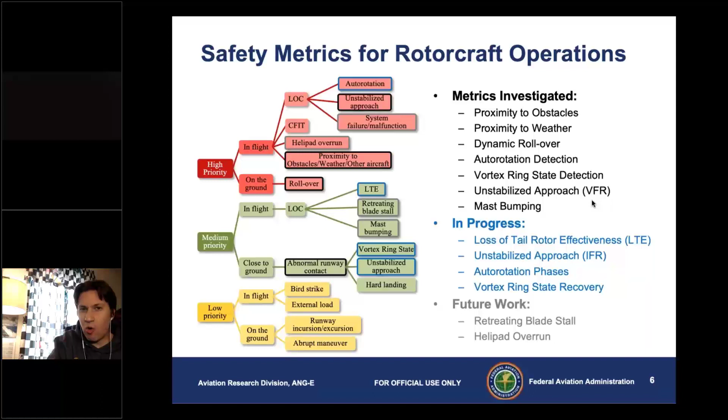So when I talk safety metrics here, I'm referring to things that are more than just your typical exceedance or event. These are a little more involved to monitor for. They may involve other data sets and other things that we have with the helicopter. This is a whole list of ones that we have, and I'll talk about some of them during the presentation.

The proximity to obstacles one was one we looked at very early on, which identified obstacles and their location or proximity to the helicopter. They're essentially a hazard. So what's the hazard? How close are they? Are they no threat? Do they potentially violate separation criteria? And we put that over a map.

We did the same thing looking at weather, using something called the vertically integrated liquid, or VIL value. It was essentially our way of categorizing weather, going from no weather, clear skies, all the way up to heavy rain and large hail.

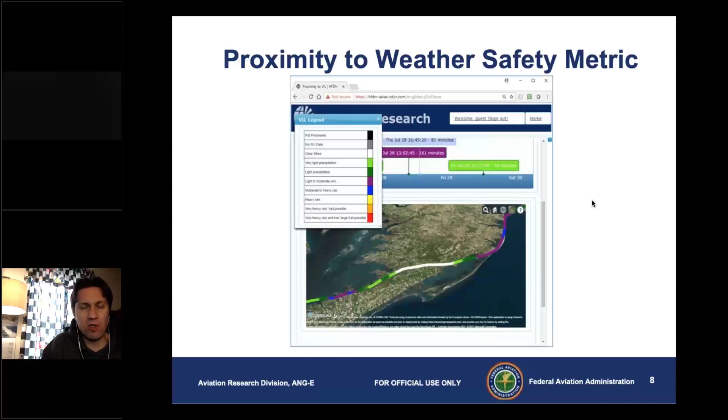And again, the idea of putting this on something like showing with the flight path. The next thing I want to talk about, and I'll spend a little bit of time on, is really this metric of approach stability. And you just saw there, let me back it up here a little bit and run it again.

Let me see here. The green helicopter represents a stable approach path down to the helipad. Actually, that one probably goes over it, right? But the orange and the red, they're kind of unstable, right? So how do you quantify that? It's really hard, right?

Helicopters are different than airplanes. We all know that, right? They fly differently. And the glide slopes are different, depending if you're a steep approach, shallow, or normal, right?

So our approach to try and tackle this was, rather than set specific definitions or guidelines for the approaches and then seeing which ones fit into that, we tried to use more clustering type of techniques to quantify the stability, but leave it flexible so that it could account for those type of things, and then use statistical analysis and machine learning techniques to try and search for patterns in the data that identify unstable approaches, or at least the precursors to it, right?

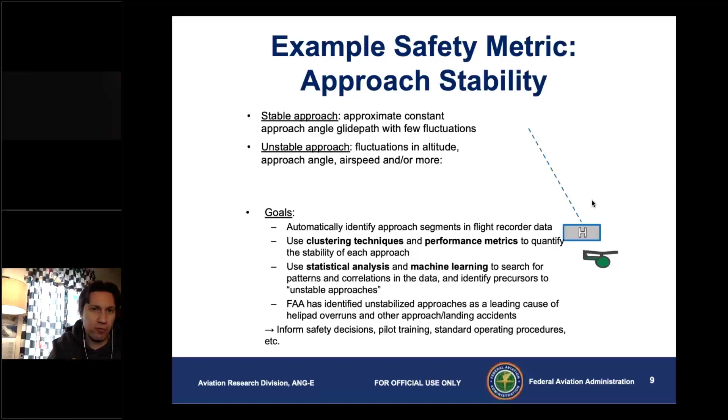And we know if we're high, we're fast, that's probably going to be a bad thing, right? Or if we're low and slow. So those type of things as well. The process works very similar to what you saw with the ADS-B data, but with a caveat to it. So again, we're looking at flight data records. Those records contain takeoff, landing, and everything in between, so you have an en route phase, right?

So we don't care about the departure phase for this particular metric. We only care about the approach. So how do we quantify that? We have to detect that there's an approach there. So that goes into some algorithms that look to see, are we executing an approach? Are we descending? Number one, and then are we near a helipad or an airport, or a landing zone, scene, different things? Does the approach have those characteristics?

And then we split it by, is it a visual approach or is it an instrument approach, right? And we have different stability criteria for each.

Yeah, I think somebody came on, but that's all right. Stuff happens.

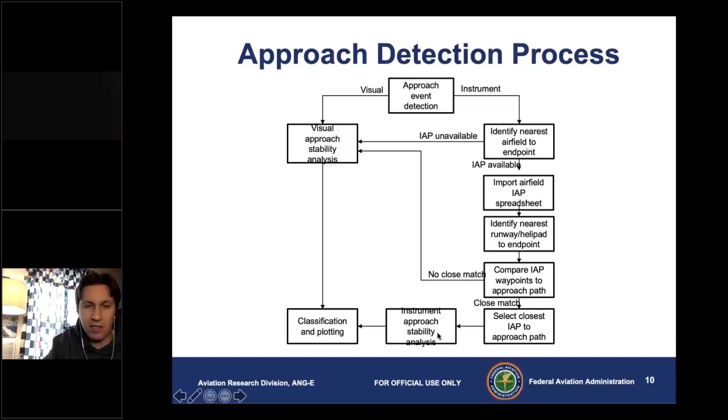So we have the visual. We go one direction, and we can't make it quite as tight as we do on the instrument. But the instrument, there's more steps to it, because we've got to identify that it is an instrument procedure, which IAP corresponds to that. Does it match? And then if it matches, can we perform the stability analysis on that? So we have this whole process.

So again, showing that we start with the published approach plates. We look up the threshold location from the database. We had been putting this into a spreadsheet before. We worked to automate that since then. We read it into, for lack of better words, MATLAB, we do some processing on it, and then we essentially build out these approaches.

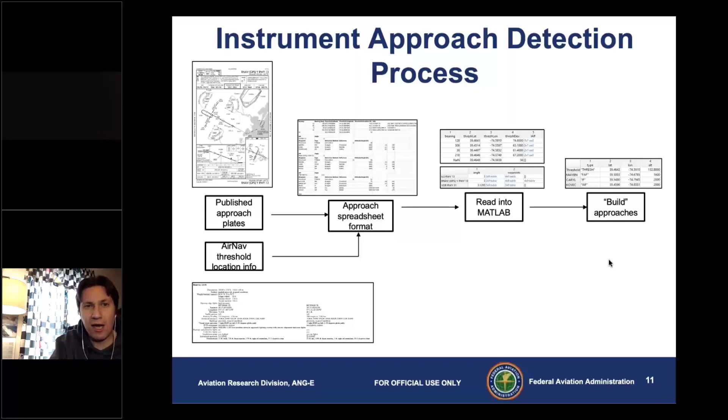Now, we also pull the data from the coded instrument flight procedures database. So that's eliminated some of the intermediate steps. But we still have to identify where all the key information is that we need to detect the approach, and then to see how well that approach is being flown, how stable is it? I shouldn't say well, because things can be unstable with no fault of the pilot at all. It's just something that happens.

So to extend upon that line of thinking a little bit, we didn't focus just on approaches. We started looking at holds and procedure turns as well, to be able to detect those in the data set. So that's part of it. So we look at how would we detect those, and the holding pattern, is that being flown correctly?

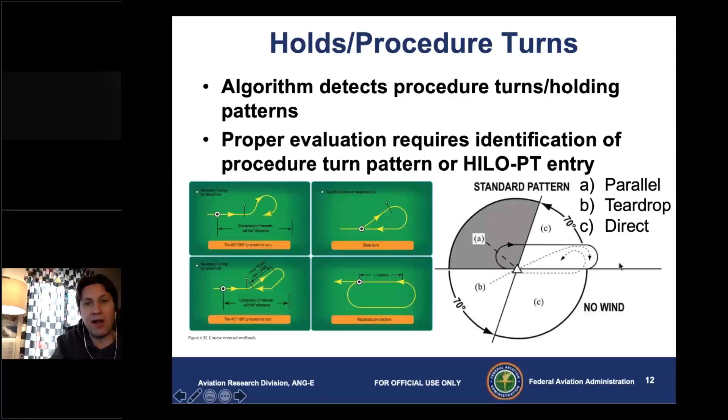But if we can identify a holding pattern, that may be another clue that we're at an IAF or on the procedure turn of an approach procedure. So here's an example of one: the ILS to runway 13 here at Atlantic City, where we have the standoff distance here. Here's the ground track, here's the distance to the waypoints, here's the closure rate and everything that shows here.

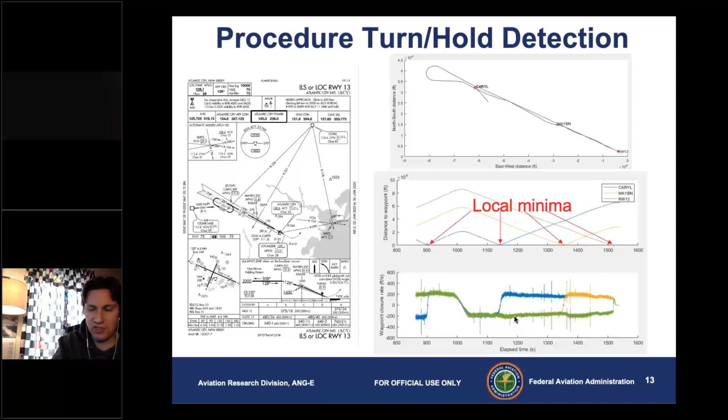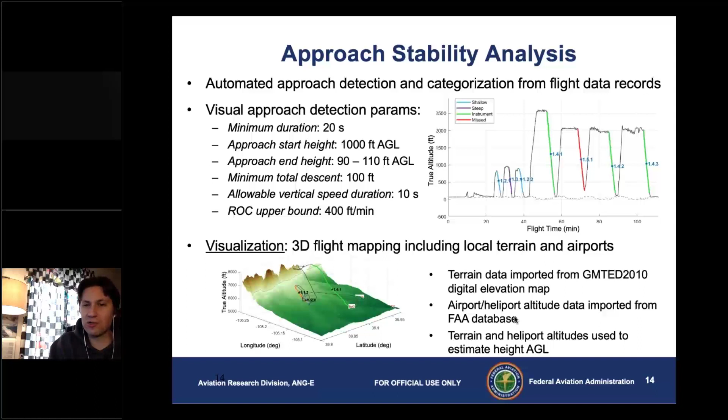The other thing that we started to do is try to visualize it. So we have to consider the terrain. We import that from one of the terrain databases, we bring in the heliport or the airport, and then we use that to estimate the AGL height, which is really important, especially if we're going to a helipad that's not at ground level.

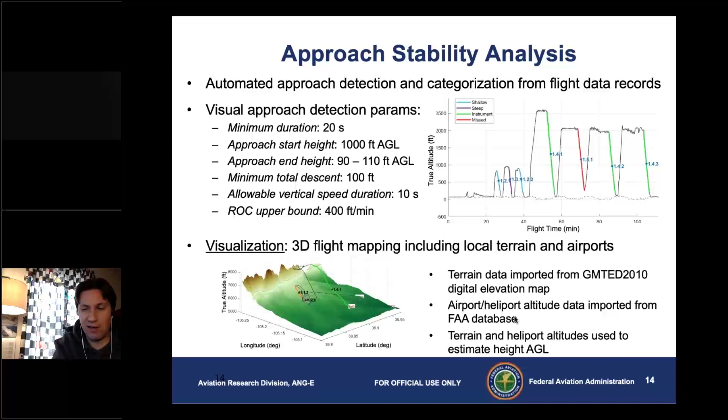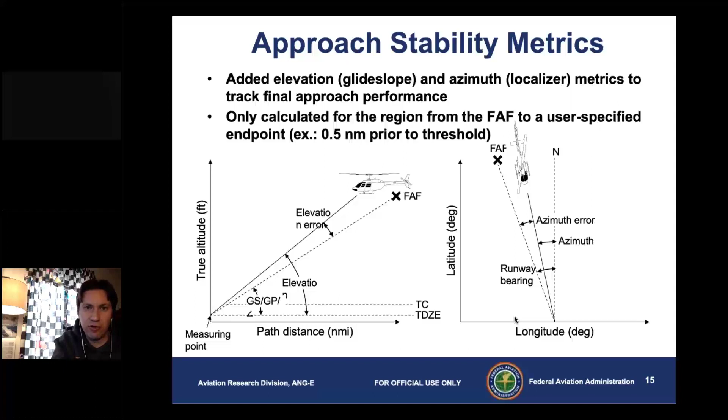The last thing that we do here is add in the elevation and the azimuth, so essentially our localizer and glide slope, to track the final approach performance. And we don't do that for the whole approach, just when we get in close, when we're coming either from the FAF or that base to final turn. Then for the ideal approach, we construct what the ideal one would be based on whether it's a normal, shallow, or steep approach, and then the best fit of what the flight path is. Then we calculate the deviations from that based upon the tracks that we see.

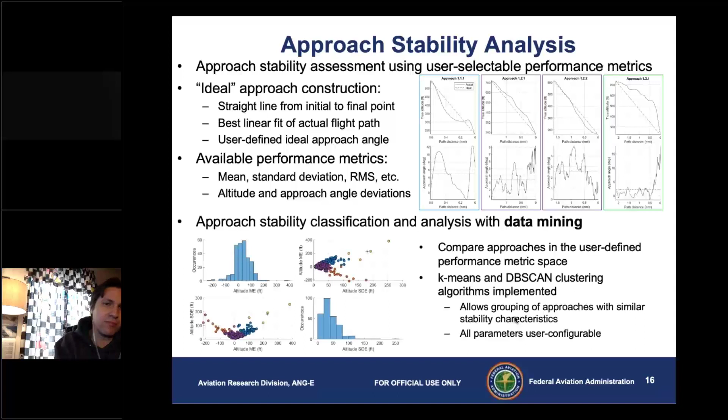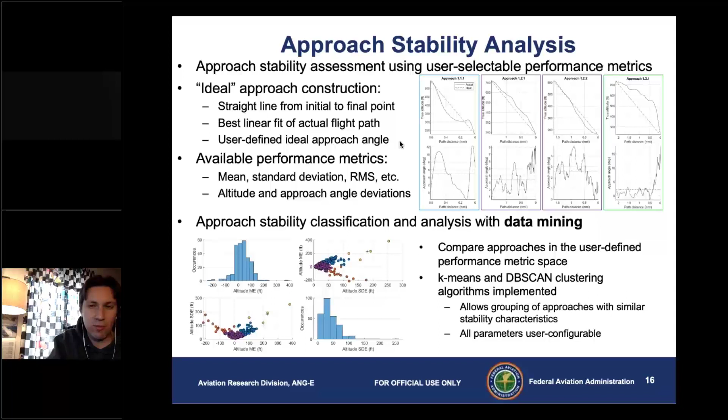And then you can do different metrics on there, like an average or standard deviation, all those different things. You combine that whole process with classifying the data and doing data mining to find out where some of the outliers are. A couple of the outliers we looked at were some of the FAA pilots, but we're not going to name names. But some of the stuff we saw with our helicopter, and other stuff we've seen over the years. Again, it helps. This is how you go about doing that.

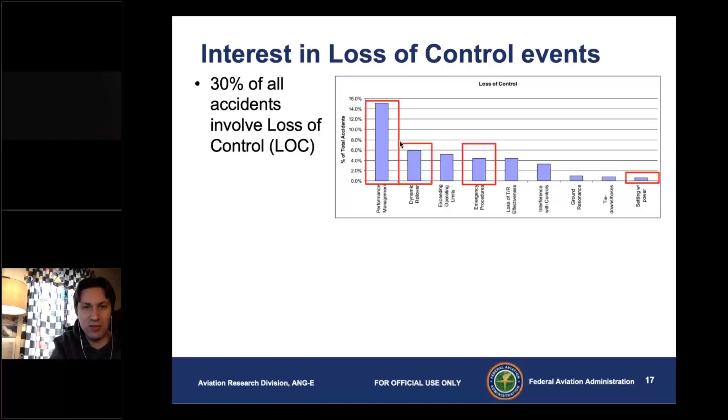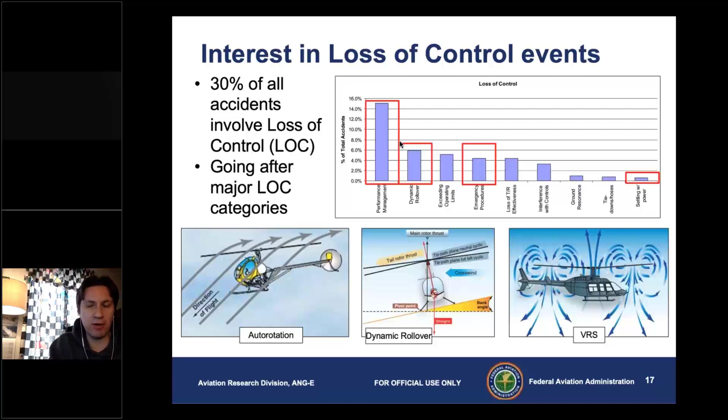So beyond approach detection and unstable approaches, I mentioned before loss of control was the #1 fatality area, so it makes sense that you really want to target that. So how do you do it? Well, not every loss of control event is the same. They all have different aspects to them. So we decided to go after the major loss of control categories. We started out with 3 things: autorotations, dynamic rollover, and vortex ring state. But then we moved into loss of tail rotor effectiveness, or what some people call unanticipated yaw.

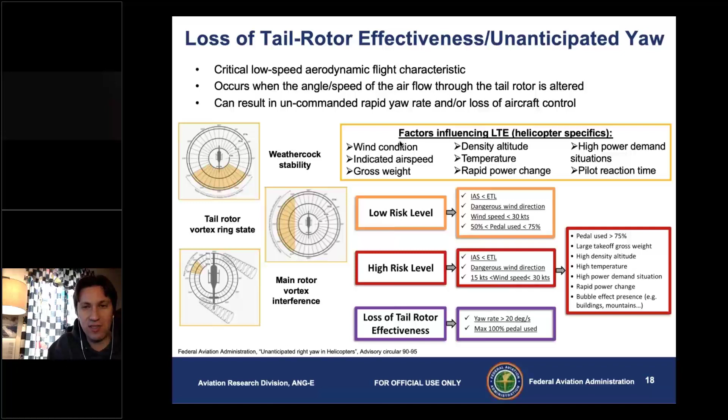But you really, to make an intervention, you want to do this before, proactively, as part of an effective safety management system. So that was our focus: how do we detect these in flight?

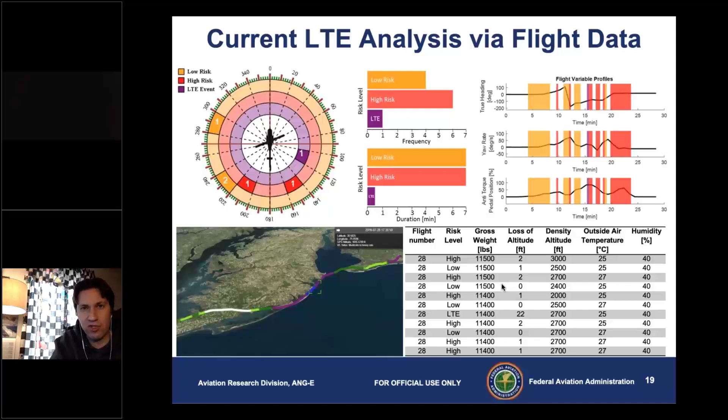So we came back with a graphic here that shows the helicopter operator, here's my helicopter, right? And then here's my events, what quadrants they're in, and what level they were at, essentially, with some statistical analysis, some graphs and some other things based upon the flight. Again, if we know this information. We realize you may not have access to all this depending upon what your helicopter is equipped with.

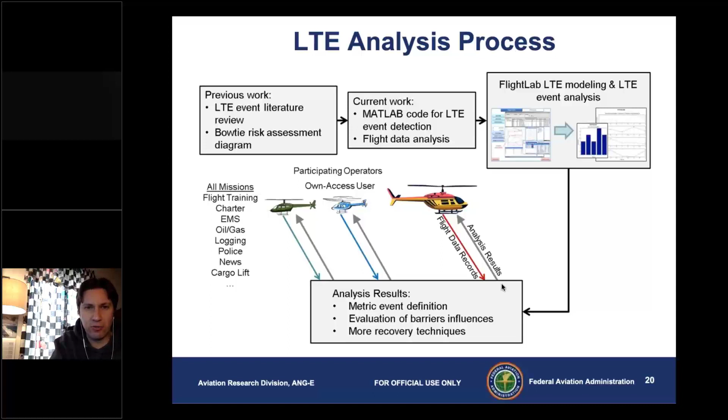The analysis process works based upon the lit review. We have some MATLAB code for the event detection, right? And then we've done some stuff in FlightLab for modeling and everything. And then we spit back the analysis results.

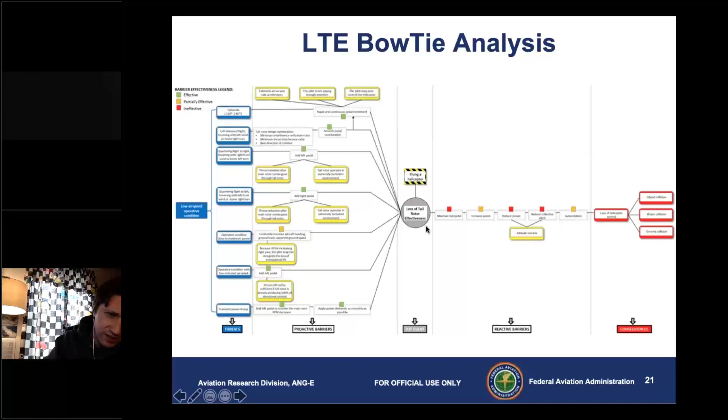We also use a BowTie model to identify what are the different threats, the barriers, the reactions, and the consequences that come out of this. And we've done this for more than just LTE, but I just wanted to show the LTE one as an example of where we're going with this and what we used as a foundation.

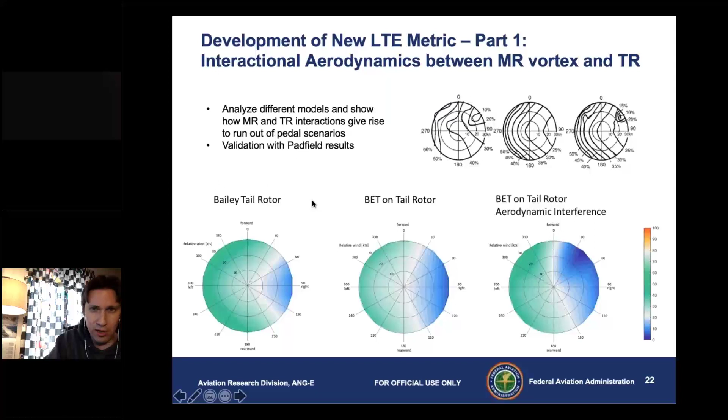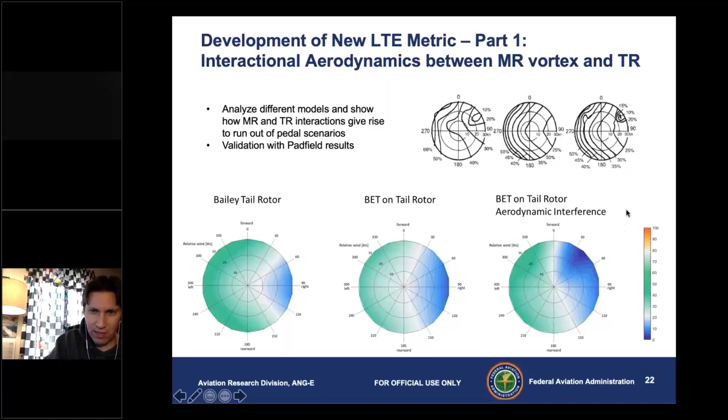And then the other aspect has been to look at the different models in the literature of aerodynamics between the main rotor and tail rotor interactions and how they're validated. I'm not going to get into all the details, just to say that we're essentially looking at the relative wind, where it's coming from, and the aerodynamics on the tail rotor, which help to enhance the metric.

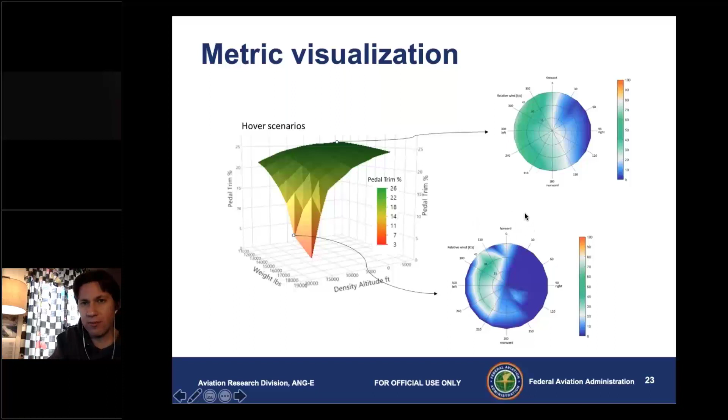And here's another one you can visualize. Sometimes it's hard to see with these 3D plots, but the idea here is you're visualizing the effect you're having in the hover scenarios from an LTE event or something that approaches an LTE event.

So part of our effort had been to compare the recovery techniques for VRS, and you have the two types: the traditional, and then the Vuichard recovery, which is basically the lateral recovery for getting out of this. So that equates to essentially three directions. You're not necessarily going to move backwards in VRS. You're more likely to pitch the nose over, get some forward speed, and get out of it straight ahead, or you're going to try to slide out of the vortex left and right.

So how does that work? We look at that based upon some initial conditions, and then we're studying the recovery time. And we did a lot of this work in the simulator, which is not ideal in the way that some of them create VRS. They're working a whole other project to see if we can improve the modeling of VRS, but it's good enough. It can get you some sense of where that occurs.

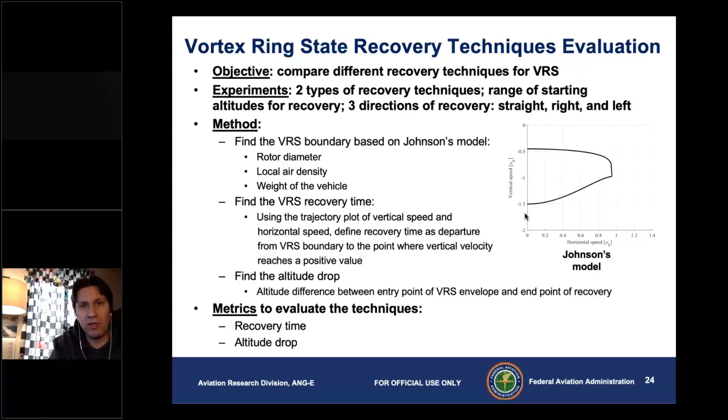And then potentially if you have some flight data as well, you can evaluate the techniques, and this can be another tool for the operator. Again, we're not recommending one over the other. They both have their pros and cons, and it really depends on the situation you're in as far as what would work best in the vehicle. We recognize that, but we did some statistical comparisons, because this is what the industry had wanted to look at the time. And by doing that, we also have better detection capabilities for VRS.

And again, you look at the altitude drop here and where the encounter shows up, because if it gets into that boundary condition, it's certainly an encounter, but it gets difficult to try to draw this curve for every helicopter and show that. So part of the challenge is how do you visualize some of these techniques for operators. So that's something we've looked at as well. So you see that there.

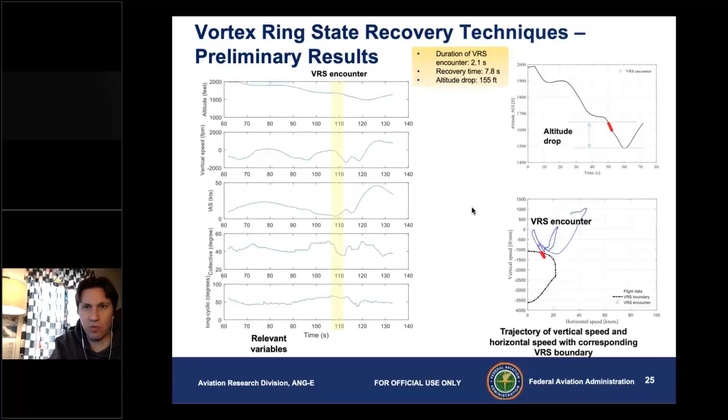The last thing I want to close with is just a mention of the ASIAS program. So as I mentioned before, this presentation is kind of focused a lot on helicopter flight data monitoring, but I'd be remiss if I didn't talk about ASIAS.

And Stephen Dickerson and I were actually double booked, so he's taking another discussion right now, so he's probably not on. But he asked me to pass along his regards to the group. He's been listening in to the discussions the past 2 days as he can.

But basically, as an update, what did we do in the past year? So we made some strides with ASIAS. The issue analysis team was formally incorporated and formed, and that's important because we have an analysis team for GA, the GA-IAT under the GA Joint Steering Committee. We have one for commercial, and that's where essentially the analyses are proposed and they're formulated, and folks go off and work the issues through the directed studies and different things.

We also got formal incorporation into the ASIAS Executive Board through the helicopter safety team. The government and industry co-chairs are actually members of the executive board now, which is great. We didn't have that before. That's a very positive step for Rotorcraft. And then we completed the procedures and operations plan as well.